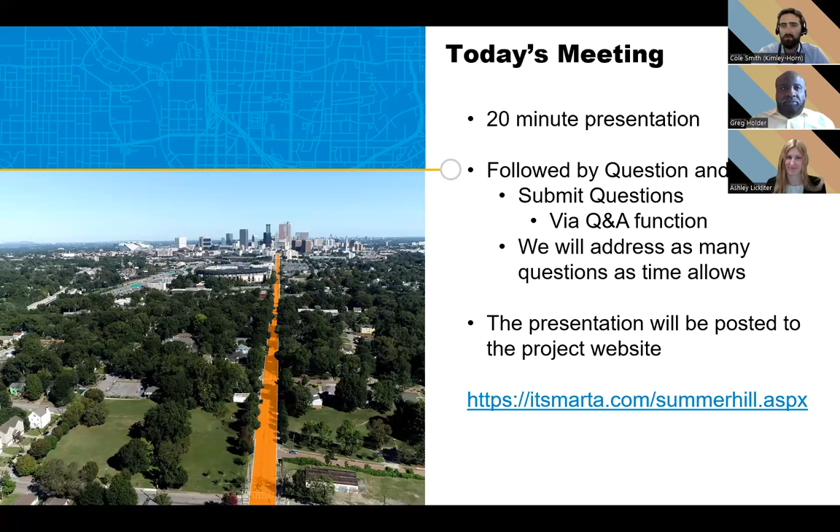Thank you, Cole. Good evening and welcome to our public meeting. I'm Greg Holder with MARTA, project manager of the Summerhill Capitol Avenue Bus Rapid Transit project. I wanted to thank you all for giving us the opportunity to update you on the progress of the project, and also the opportunity to address some of your previous concerns. We'll also have an opportunity to take any current inquiries as well.

With the agenda tonight, first we'll welcome any council members that may be here and give them an opportunity to speak. Then we'll give you a brief background of the project and an overview to refresh everybody, and show you some of the station renderings to give you an idea of what they're actually going to look like out there. We'll talk about the roadway and typical sections, what that's going to look like as well, and then some of our stakeholder outreach. We'll show you the southern terminus, which is pretty much the end of the line on our route, and then start talking about some of the concerns that you had brought up from our previous round of public outreach and address those. Then we'll give you the timeline of the project and take an opportunity for some questions and answers.

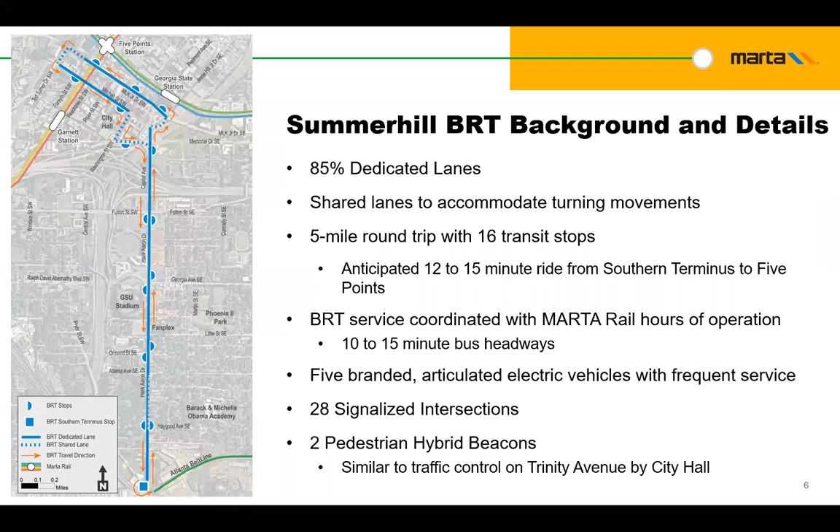The project will consist of 5 60-foot articulated electric BRT buses, running along a 4.8 mile round trip route that spans from the Atlanta Beltline on the south and goes all the way up to the downtown Atlanta core on the north. That 4.8 mile route will consist of 16 premium transit stops spread out at approximately one-third of a mile to meet the gold standard. The buses will run on 85% dedicated bus lanes with traffic signal prioritization and intelligent communications. Basically, the traffic signal prioritization means when it gets to a light, it actually has the ability to get that light to change so it gets through and keeps the headways.

It'll also run along the locally preferred route. The buses are going to serve major institutions, government facilities, employment centers, and houses along the corridor. It's also going to run adjacent to 3 MARTA rail stations, which are the Garnett Station, 5 Points Station, and also Georgia State University Station.

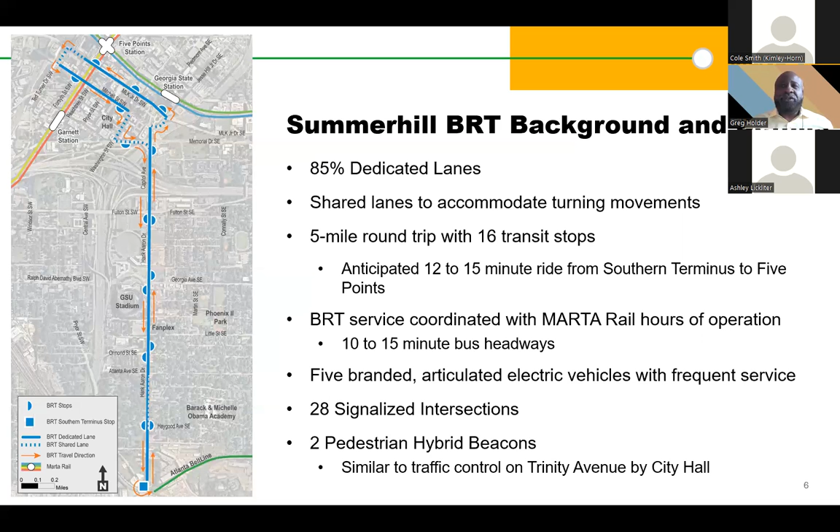We can go to the next slide.

Here you can see some of the passenger amenities. These premium environmentally friendly vehicles will operate on surface roadways and primarily dedicated transit lanes, similar to the rail system. They're going to pick up passengers on a more frequent basis at sheltered platform stops with ADA accessible level boarding. In some of the photos you can see how they get right off the bus and right onto the boarding platform, because the height of the platform is 14 inches.

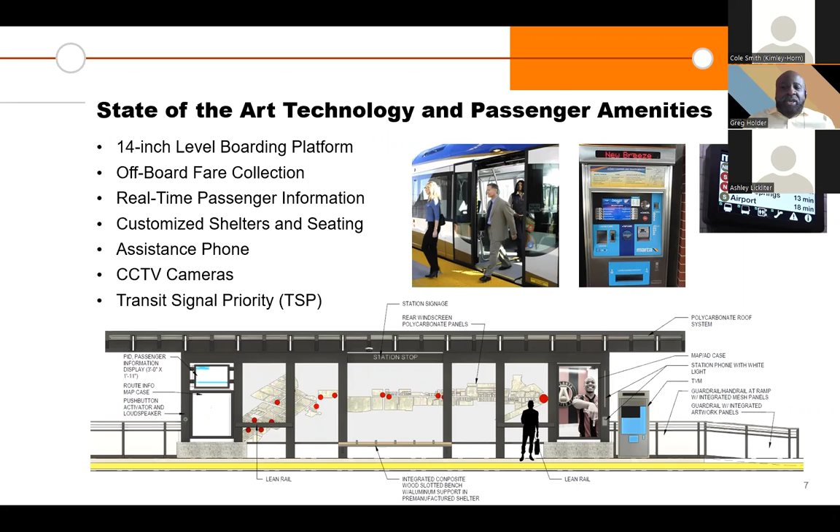You can see also that there's ticket vending right at the shelter, so you don't actually have to pay or wait to pay as you go on the bus. You'll already have paid before you get on there. There's also real-time arrival signage so you'll be able to see and know just when your bus is going to arrive.

Now we'll take a look at the shelters and the layout. On the top, the shelter layout, going from the left side underneath the canopy to the right, we've got that real-time arrival sign at the top. Just underneath it, there's a map panel showing you basically where you're at in the route. Then you've got about 5 other panels, which are transparent and translucent windscreen panels, and you may have some art put on those, something reminiscent of the community itself. Then to the right side, there's one more panel, an opportunity for advertising.

Then right beside that, there's the ticket vending machine, and just along that area it's a defined waiting area. So you've got lean rails, seats there too, ADA waiting areas. Then to the far right side, that long pole looking thing is a bus arrival indicator. It's about 15 feet tall, installed at the end of the bus ramp, but it's visible from the cross streets and down the street, so you'll get an idea visually if you're a little further away as to how close your bus is if you can't actually see it. That would let you know if you need to speed up to get to the stop or if you can take your time.

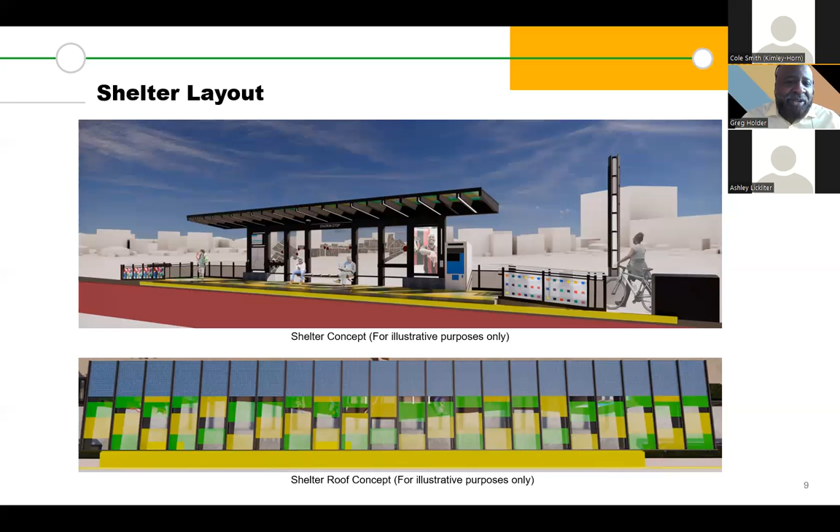So that will be saving energy there. And primarily just wanted to show those as well, just to kind of show the resemblance to subway rail stations, just the difference these are being, of course, on the ground level.

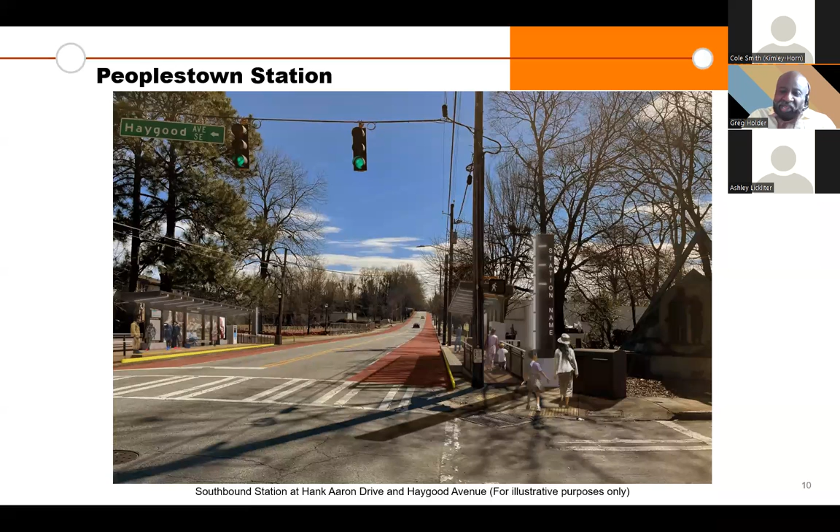And so in this rendering, you're seeing the northbound and southbound. It's on Hank Aaron Drive right at Haygood, in the Peoplestown area, just to give you an idea what the actual shelter would look like on the roadway.

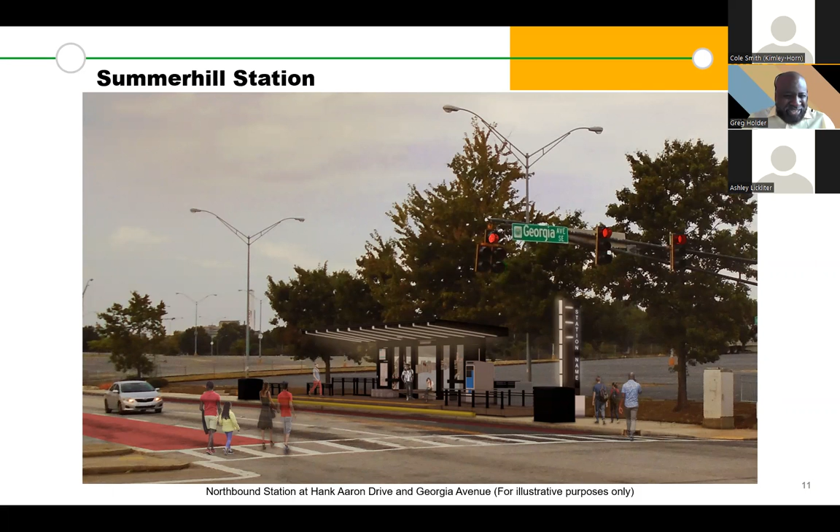Here's another one. This is further north, going northbound, on Hank Aaron right at Georgia Avenue. Just behind there, that's adjacent to an upcoming Carter development, where I believe they're putting in a Chase Bank, and there's also going to be a Publix in that area.

And lastly, this is one we took on eastbound Mitchell Street, right at Broad. This is adjacent to the Newport development that's going in there. You can see here that the sidewalk runs behind it. And this one, we actually had the stop jetting out into the roadway. What this actually works as is a protector, because there's on-street parking on either side of this. So that works out pretty good as a protector for those parked vehicles.

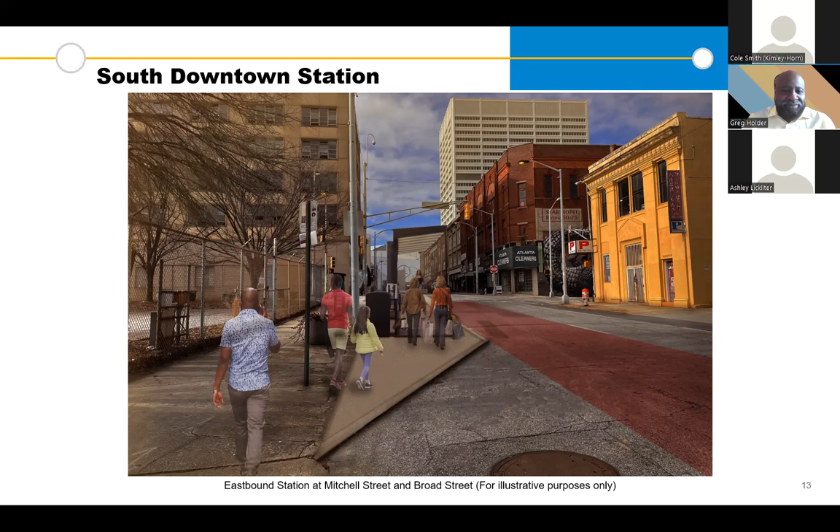And Ashley Lickliter will talk to you about the typical roadway sections. Thanks, Greg. Well, as Greg mentioned as he started off the presentation, the Summerhill route is really fortunate to have 85% of the lanes dedicated to bus only. So we're going to talk through a couple of the different scenarios so you can envision what that will look like in the future.

So this is a great example of a rendering of what the Peoplestown neighborhood will look like. This is just north of the Haygood intersection. You can see this was an interesting section of the corridor where we worked to make sure we could preserve some on-street parking for the residential communities and the homes located right along Hank Aaron in this area. So you can see we'll have a dedicated lane coming southbound, and the bus will share space with general purpose traffic going to the north.

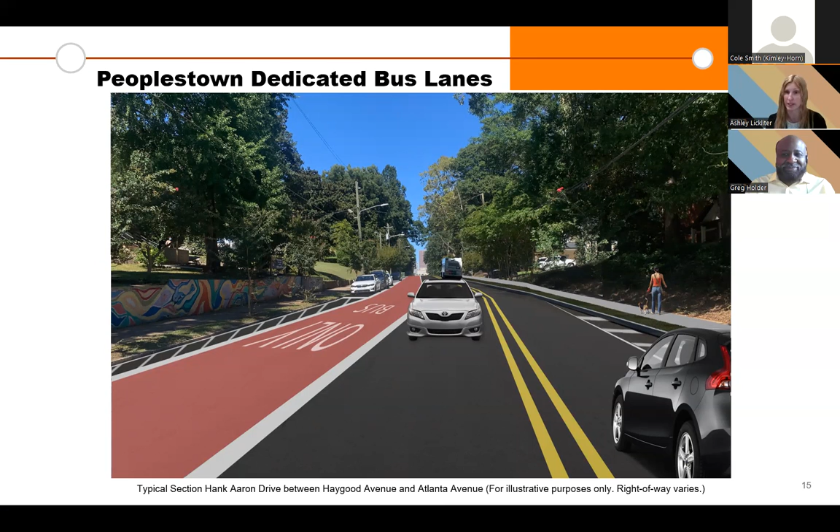Let's jump to the next section and we'll look at what the corridor looks like in Summerhill. This is the area right around the Publix grocery store that Greg had mentioned earlier. You can see we have dedicated bus-only lanes, both in the northbound and southbound direction in this section of the corridor. I think this is a really exciting area of the corridor to see all the redevelopment that's happening. Obviously, you can see in the background of the screen here the new development at 565 Hank.

Obviously, we're really focused here in this area of the corridor on all of our safe multimodal accommodations. You can see there are safe sidewalks that are accessible. There are bike lanes on both sides of the corridor here, both southbound right on the road, and then our separated bike lane going northbound. And we've also been able to provide on-street parking in anticipation of the future redevelopment along this area of the corridor.

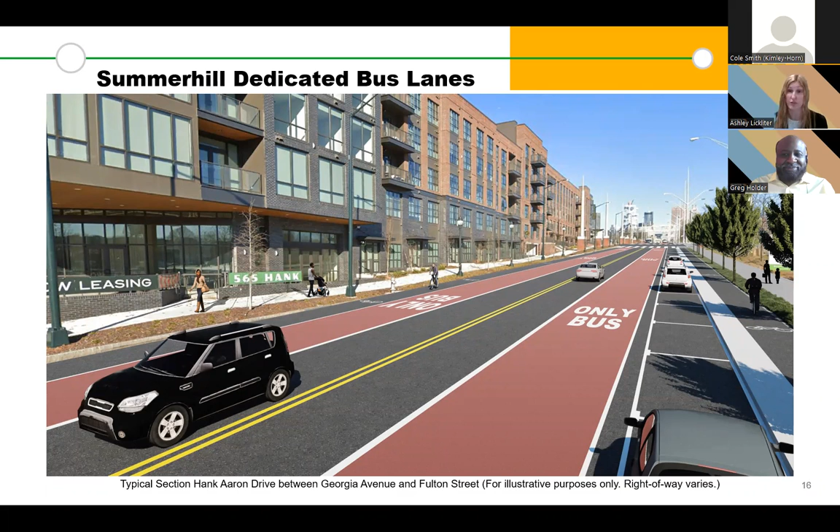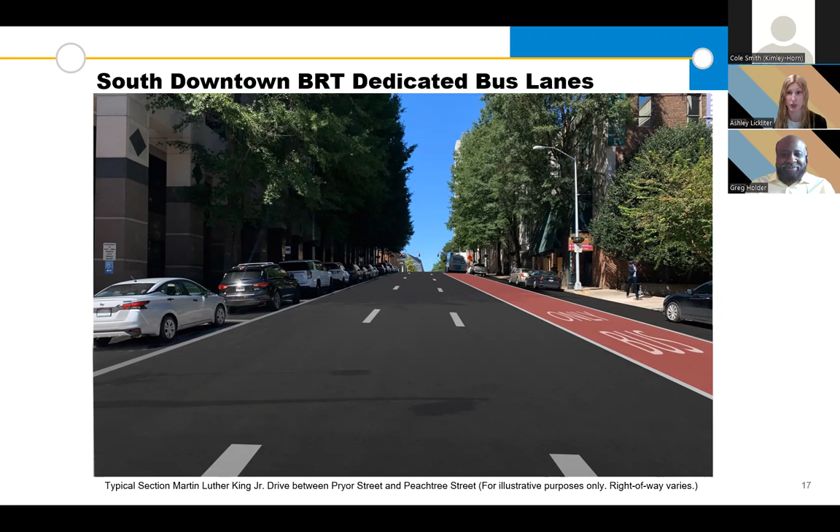Let's hop into downtown. This is the area of the corridor along MLK. On MLK, we also will have dedicated bus-only lanes along the full length. This is going to be great, obviously, as we get into downtown. We have additional congestion along the route, so it'll really help the bus stay on schedule and provide that rapid service to customers through this area of the corridor.

And then we have one more area. This is over on Mitchell Street. Again, the entirety of Mitchell Street will have dedicated bus-only lanes. We've also worked to make sure we're preserving parking for the neighborhood and the businesses in this area. But again, these bus-only lanes are really a wonderful amenity for the project. As you can see here, they will also have some colorization to help reinforce that that space is intended for the buses and to help Marta with the enforcement of those lanes.

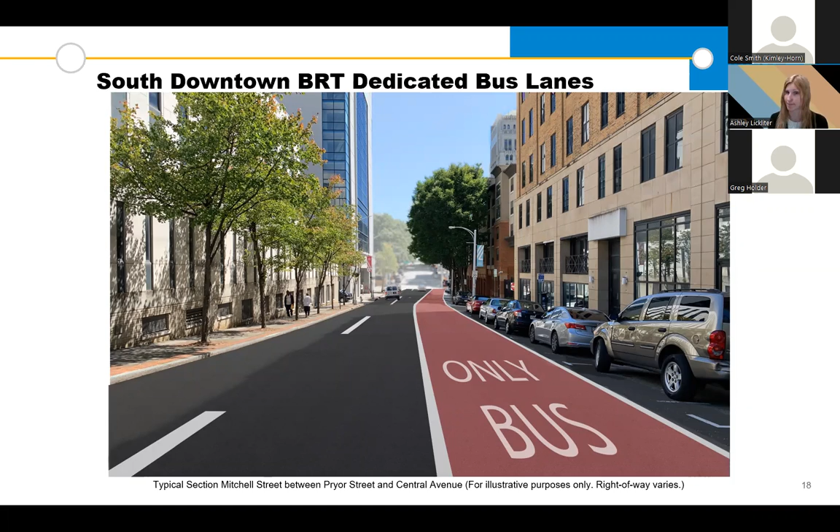Stakeholder outreach: we've held multiple meetings with public and private organizations, federal building authorities, and developers along the corridor to ensure our design plans and stop locations are in sync with their ongoing projects.

This is our southern terminus location. As mentioned previously, we heard great feedback from the community during our public meetings in the fall. One concern was about the southern terminus and making sure we provide safe accessibility for folks in this area. We acknowledge the pedestrian crossings here need to be very mindful, safe and accessible.

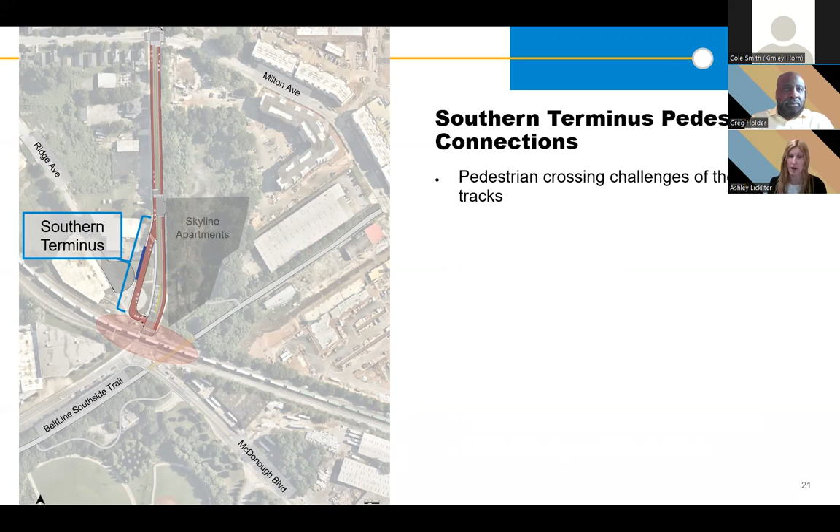One thing happening in this area is great improvements to the Atlanta Beltline South Side Trail. The South Side Trail recently got a RAISE grant, which is really awesome for our community to advance this project. We'll have a couple planned access points to the Beltline. Additionally, the Skyline Apartments is a really exciting development here, providing wonderful residential uses, and they are also planning a connection down to the Beltline Trail as part of their development—a great partnership between Skyline Apartments and the Atlanta Beltline.

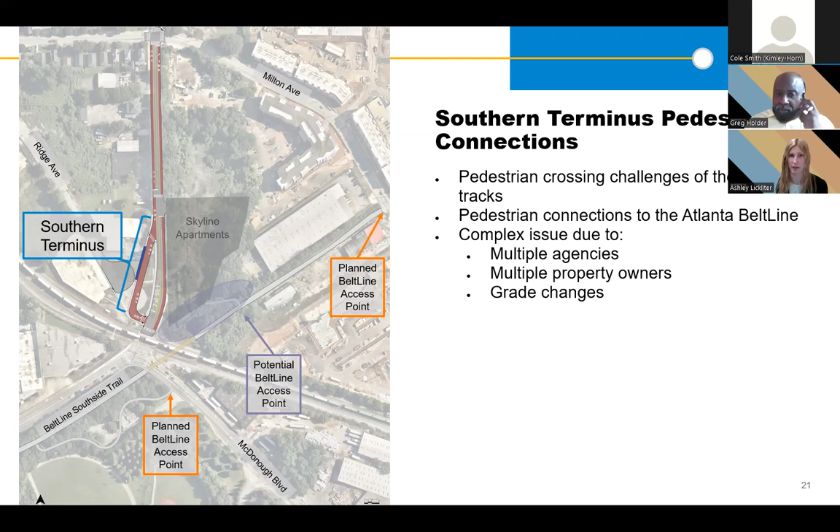This is complex—we've got a lot going on here: the trail, Marta service, redevelopment happening, and the railroad. There are many different entities involved in finding a viable solution for safe pedestrian access. Greg has started meeting with other agencies, including the city, Norfolk Southern, and the Georgia Department of Transportation, which is in the process of upgrading this traffic signal and providing additional pedestrian accessibility, as well as private property owners and the Atlanta Beltline.

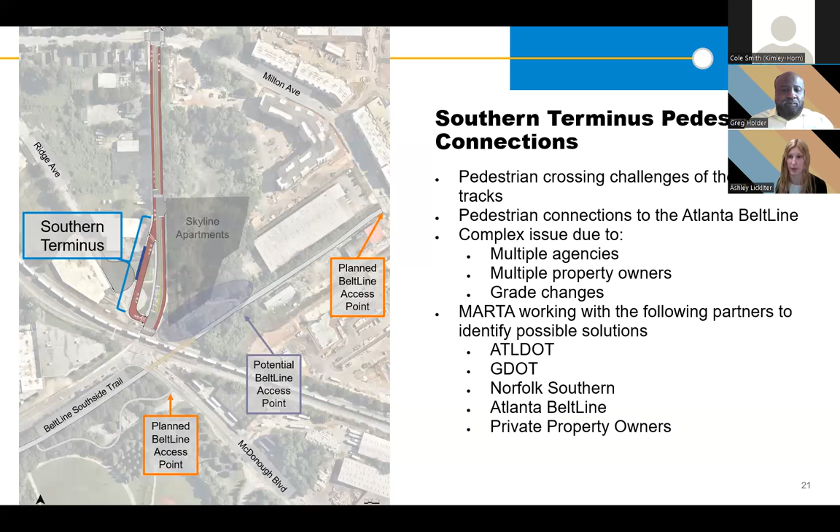Also worth mentioning is the Marta Route 55 service, which provides great accessibility in this area and across the railroad track. Marta is working in partnership with all these additional entities to make sure we come to a good solution for the community that provides safe and accessible connections here.

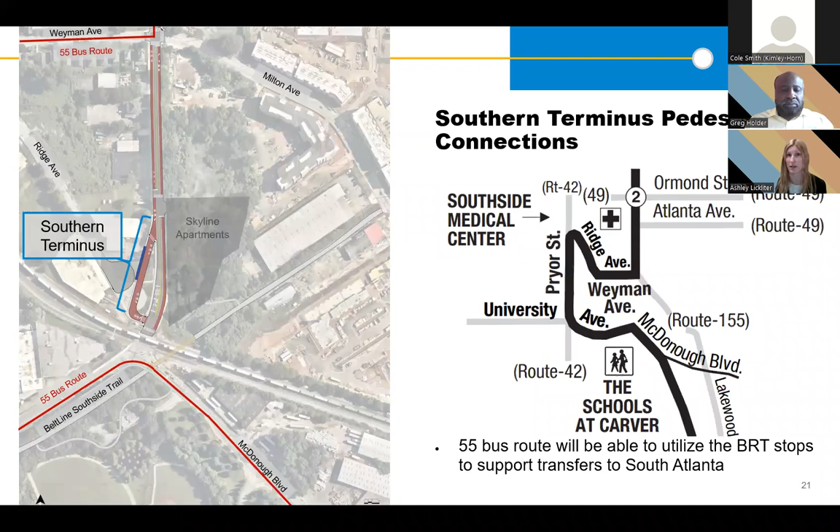We also looked at pedestrian connections at the three heavy rail station locations, to make sure it's a good experience for pedestrians after they get off the bus and make their way to the station—like the MLK station we talked about earlier, and the Georgia State station just around the corner.

We went out and looked at current conditions and what's needed to bring the sidewalks up to a reasonable state, also checking curb ramps, lighting conditions, and wayfinding. Visitors may get off and not know where the heavy rail station is, and we noticed the wayfinding signs are right at the station, so we'd add signs from the BRT letting them know which direction to go.

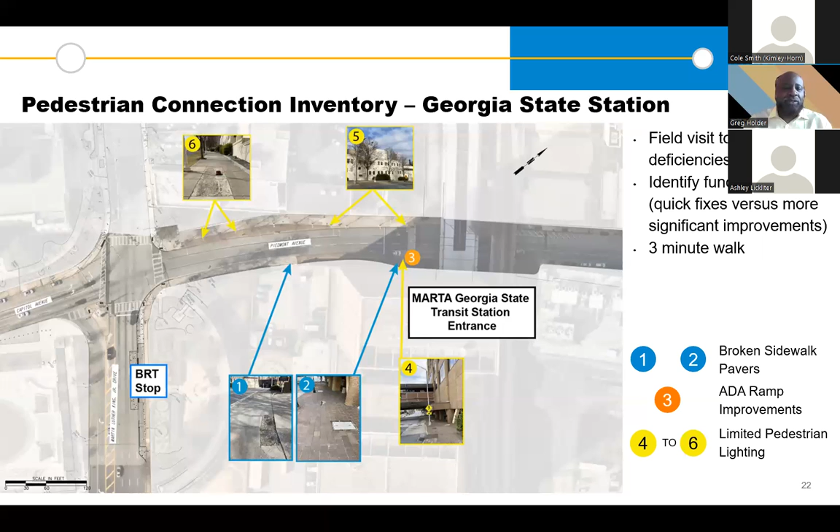These photos show some of the conditions out there—maybe hexagonal pavers needing replacement, trees upheaving pavement or sidewalks creating trip hazards that need removal, plus installing curbing and lighting where needed.

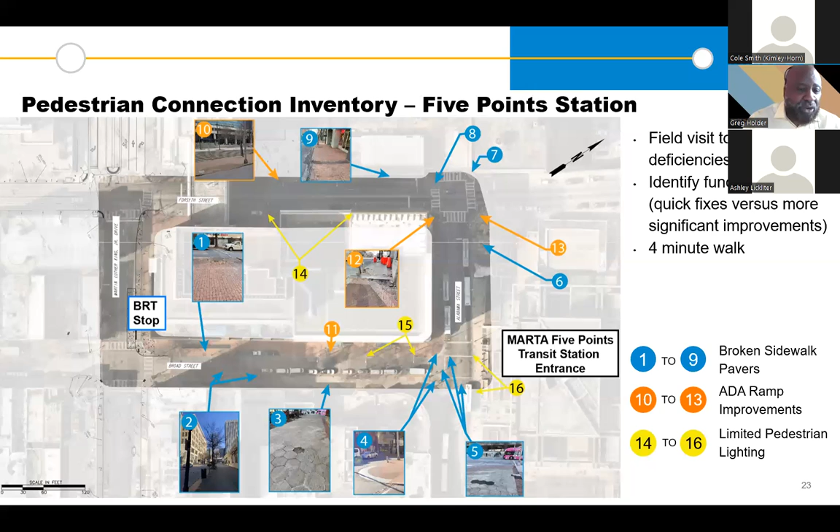This shows the Five Points station, where you've got two opportunities to reach the station from the BRT stop—along Broad Street or along Forsyth. We looked at both the top and bottom locations, and at Garnett, where you get off at Mitchell and Broad, cross to Trinity, and go right into the station.

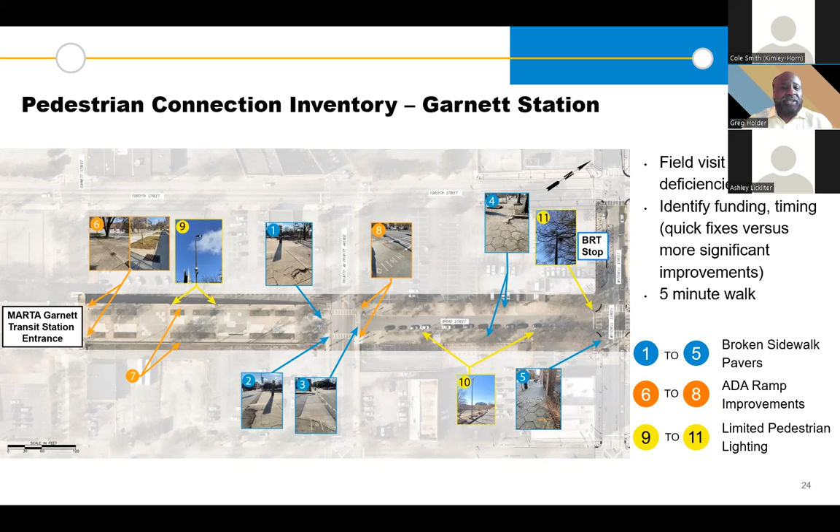We looked at the situations out there and have been working with our agency partners, the City of Atlanta, and we'll also be talking to developers in the area—I know Newport is doing work there too—who seem ready to assist and help make sure the project is a success.

And then the dedicated lanes, that was something else that we heard. For the most part, 85% dedicated lanes. This is a really good BRT project, because when you look at it nationally, they consider anything over 50% dedicated lanes to be a fixed guideway. So with us coming in at 85, that came in relatively high, but we still wanted to look at whether there was any opportunity for us to get even more.

So we took a look at some of the shared sections that you can see on the map on your left side, the parts that are in yellow. There were 3 areas that we looked at for the possibility.

One of them, up near the top, was MLK from Forsyth to Ted Turner. On that particular side, the bus is on the extreme right side of the roadway where it stops, and it actually stops on the near side before the signal. Then to go through the signal, it would have to work its way over to the left most lane in order, when it gets up that one block to Ted Turner, to make that left turn. Because there's only 2 lanes going up that direction, at this point it wasn't really a good option for us to go with that, because the bus has TSP and typically can get out before traffic, or right after the traffic, so it wouldn't have much competition at this point. So we just said it was an opportunity to look at that location, but at this point we weren't going to make the change.

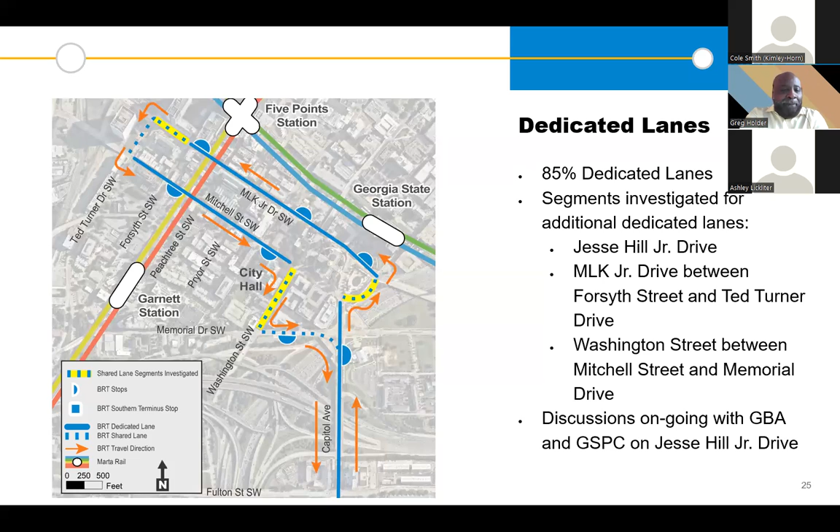And so bus enforcement was something else that we heard. At this point, what we're planning to do is some major education and marketing campaign to make sure that everybody understands how to operate, especially around a bus-only lane. This is our first ever bus rapid transit in the area, so there's going to be a lot of education out there that we'll have to do. Along with that, we also have the backing of the Atlanta APD, who will be there as well, helping with enforcement. We're also looking into other areas, like camera enforcement, which is something that we're pursuing.

Of course, with that, it would be more than just us pursuing it - it has to pass the Georgia Assembly. So there's a little bit more that we're actually doing in order to get that enforcement out there.

But there's one thing about having these lanes as well - there are no barriers. We didn't actually have the width on the roadway to put barriers to have the lane barriered off. But if there is some sort of an issue for some reason in the lane, the bus does have the ability to go around it and then get back in the lane and keep going. So that's actually another plus for these BRT lanes.

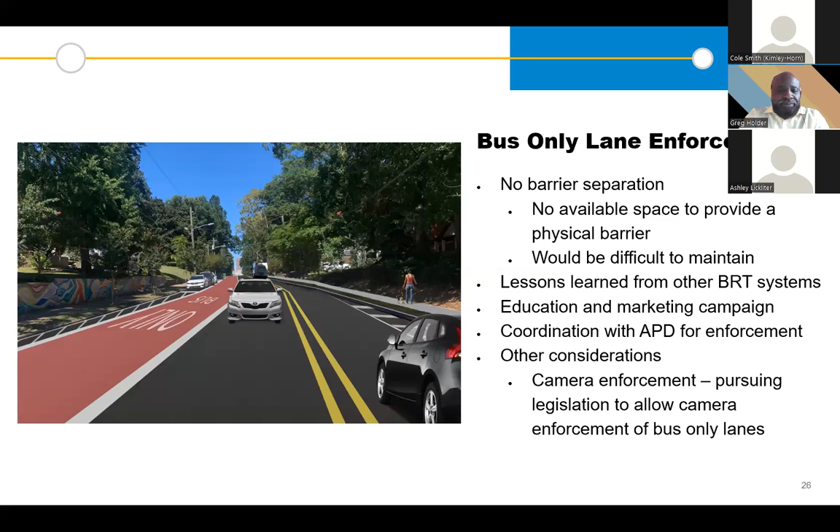And I'll hand it to Ashley with the bikes. Thank you, Greg. So another one of the great comments we heard from the community was a desire to make sure bikes were able to be safely accommodated along the corridor. Marta has worked really hard with the team at the City of Atlanta to figure out ways to do that.

The city is going to be moving forward with the Washington Street Cycle Track project, which is a really exciting project to provide great north-south connectivity along a great route there. So as part of the BRT project, we've made sure to provide connectivity into that Washington Street cycle track.

That's going to look different ways depending on what corridor you're on. Along Trinity, we have a short section that will be sharrows and shared spaces. As we move on to Memorial and down Capitol, we'll have a combination of bike lanes either on the sidewalk or the road, depending on available space. But the bikes will have dedicated space that won't be shared with pedestrians, the bus, or cars - it'll all be dedicated space as we continue south down towards Hank Aaron.

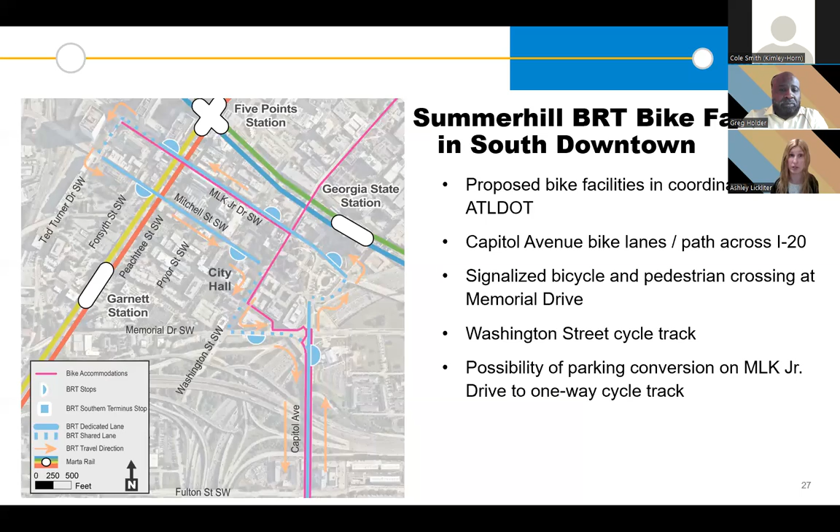We also want to make sure we're providing future connectivity further along the corridor. You saw in the cross section earlier the area where we're doing the redevelopment at the Publix grocery store - we are going to have bike lanes in that area.

We want to make sure we connect to future bike facilities along Georgia Avenue, which will give us great access to eventually get down to the wonderful redevelopment and improvements of the Atlanta Beltline and the South Side Trail. So what we envision is using some of our great neighborhood streets to provide those lower stress and safe bike accommodations to get people down south to DH Stanton Park and eventually to the Beltline.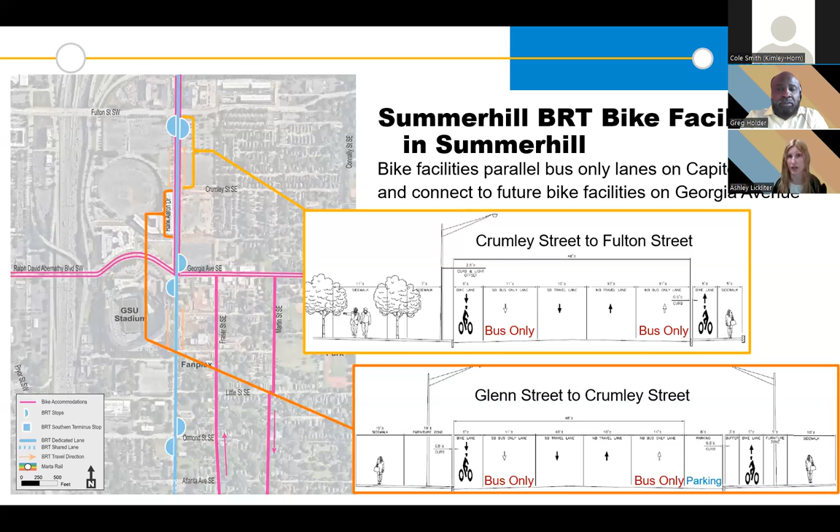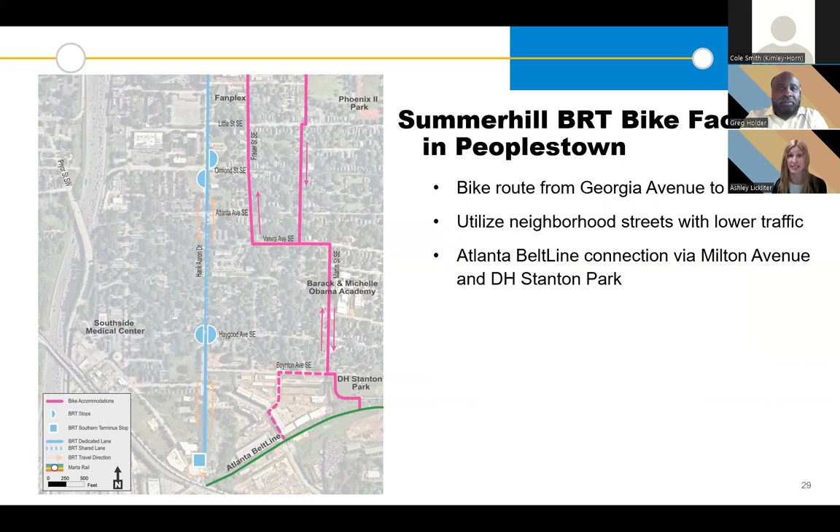We really appreciate the comments that came through from the community. Marta is very focused on understanding that folks using the BRT may also be taking their bike on the bus, and we want to make sure when they're getting on and off that they have safe places to access and go. Thank you so much, Cole, for sharing these great slides.

Then we'll advertise the project for construction bid, and we're anticipating starting construction in the late spring of 2023. We're anticipating construction to last roughly about 2 years, so it'll be finished in spring of 2025. Then we'll complete the system and vehicle testing and any needed training, and begin revenue service in the summer of 2025.

So it's pretty exciting times - the project has definitely moved along. With that, we'll stop here and give everybody an opportunity for any questions or further discussion on the project.